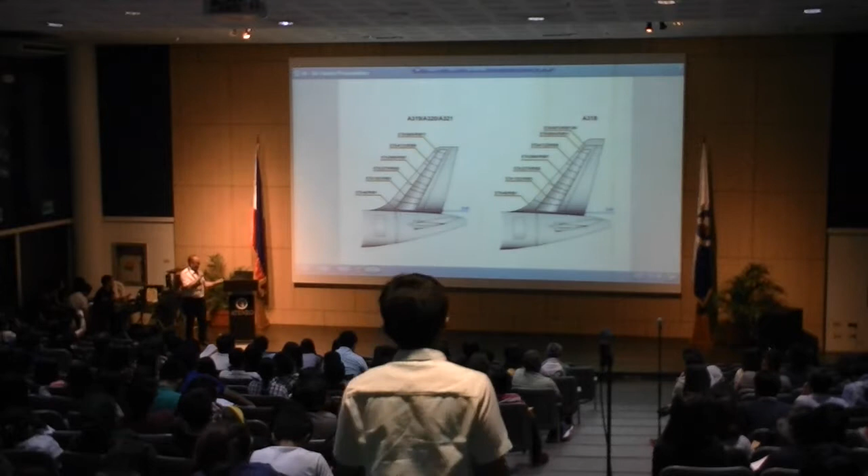Okay, so this one is our wings. So this is the vertical stabilizer, still part of the same section. So this is the wings.

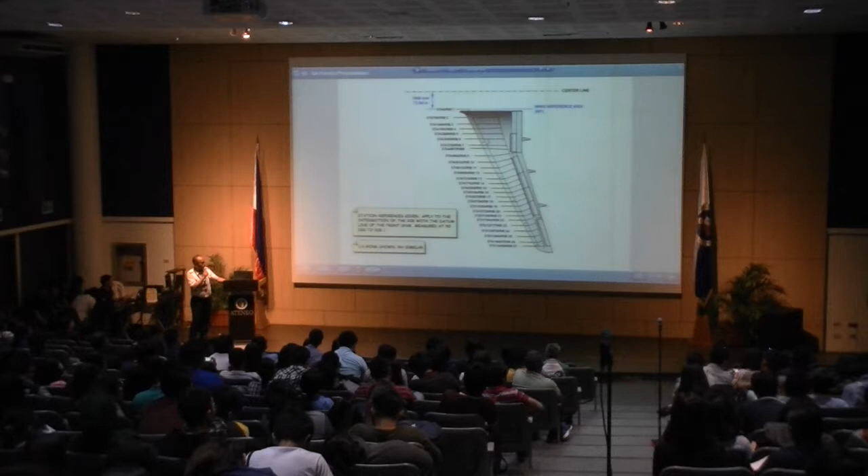Okay, left wing ito. And by the way, for information, those stations are a measurement in millimeters. So if it's your first time approaching the aircraft, for as long as you know station 0, with a measuring tape you can establish what station you're at. Plus you have SRM too.

Okay, so SRM is a software. So that's provided by the OEM, like Airbus, to check on our repairs and our damage evaluations.

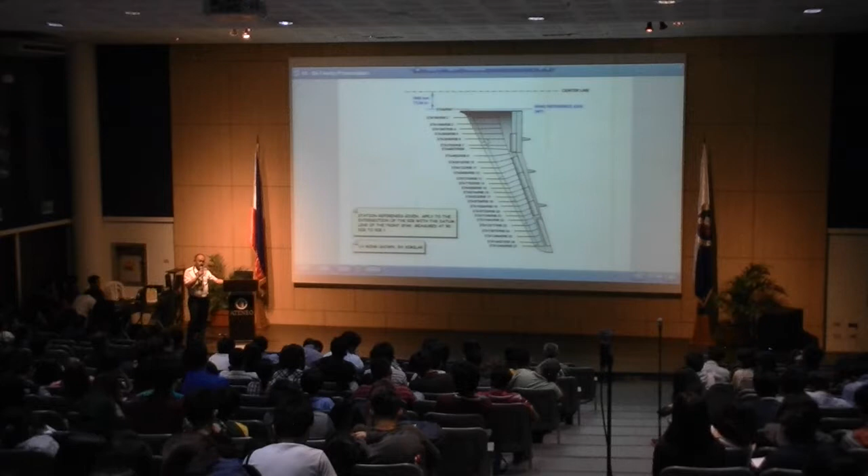Okay, so we have a 2-man cockpit crew. Before, there were days we had a third officer, whose job was to check our instruments. But now our displays are hybrid. Actually, our EIS is now just 6 - we have 6 LCDs in front for the pilot. That's why it's just pilot and FO now; there's a third occupant seat but it's no longer required on the aircraft. So really just two people fly our aircraft now.

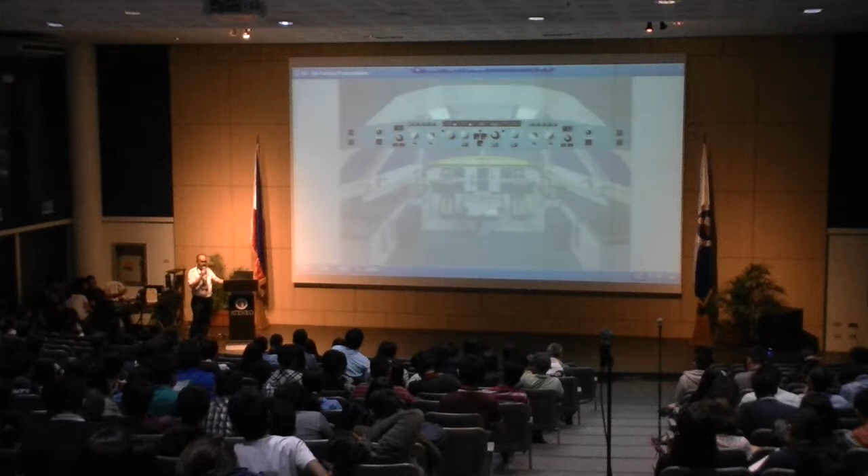Okay, so this is what I mentioned earlier. We call this EIS, Electronic Instrument System. So we have 6 of these - there's the PFD-ND on the captain's side and the FO side. Primary flight display and navigational display.

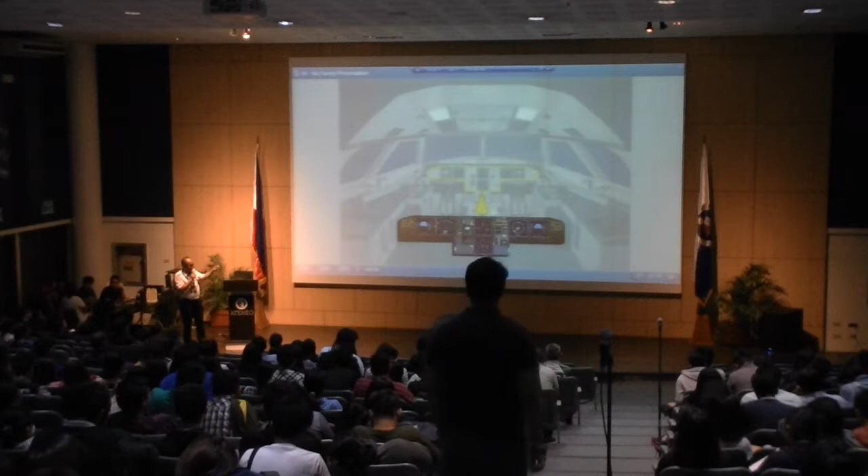In the middle, we call that our ECAM - Electronic Centralized Aircraft Monitoring. So the upper part, in the middle, is dedicated for the engine - whatever is relevant during the flight, relevant to the aircraft, all the way is our engine.

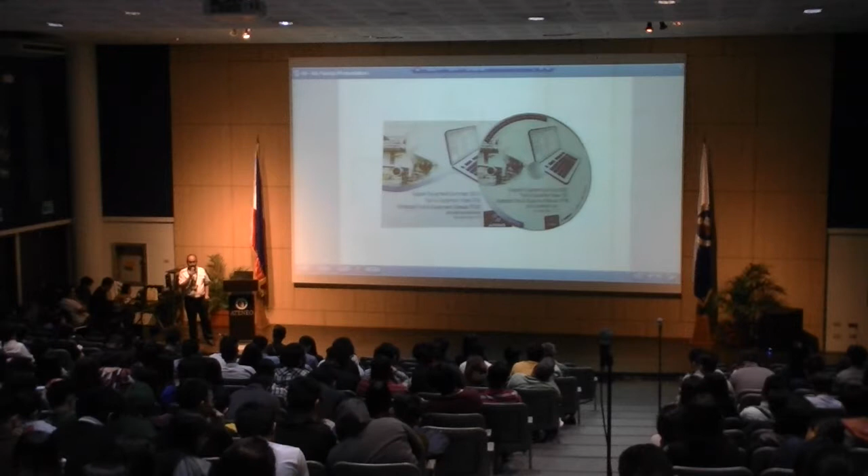Okay, yung tinatawag na Tools Equipment Manual, TEM. So kasi merong specific tool at meron tayong standard tool na ginagamit sa aircraft. Okay, so provided din yan ng Airbus.

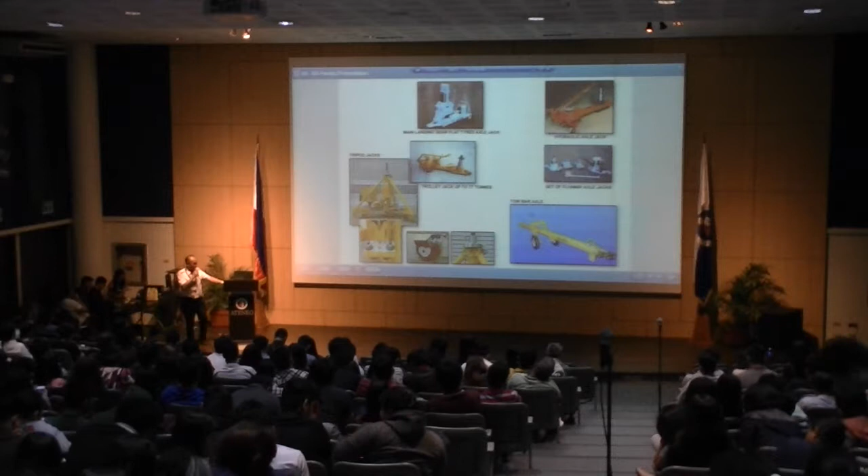Ayan, so ito na yung mga tow bar, ayan yung mga jack. So pagka meron tayong mga gear swing, yun yung ginagamit natin. Okay? Yan, so ito example ng aircraft that is on jack. Pagka meron ka problema sa landing gear, gina-jack up siya.

So meron tayong gear swing. Okay, so this is to check yung integrity ng ating system natin. So parang inaangat mo yung aircraft para makapag-retract ka ng landing gear natin. Okay? So normally ginagawa yan sa hangar. Okay? So this one is aircraft in pushback.

Okay, so doon sa manual ng Airbus, laging mayroong warning and caution. So warning pertains to, normally pag hindi natin sinunod, possibility of injury to person. Okay? Yun namang caution, possible damage dun sa aircraft o kaya dun sa equipment natin.

So that's why during the maintenance, we normally read this one. Meron kaming instances like yung isang trainee namin, nag-power up ng aircraft, anong ginawa niya? Inon niya yung GPU, saka niya sinaksak yung AC receptacle.

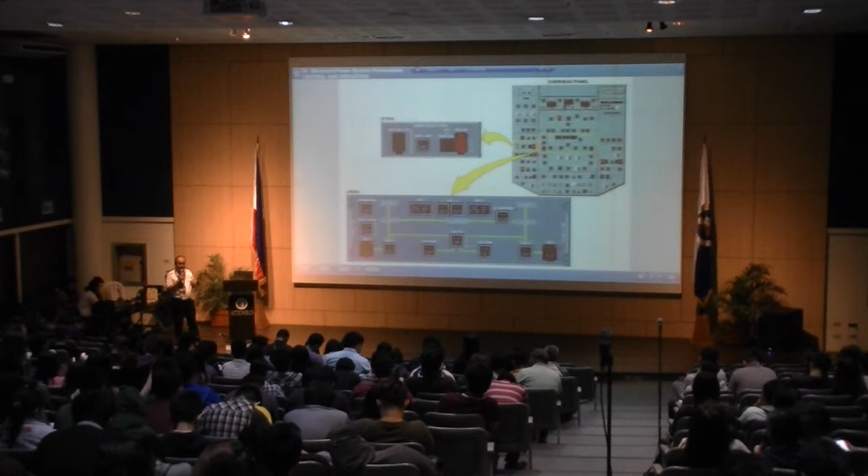Ibig sabihin, naka-off yung aircraft natin. Kasi yan ay nakadiretso doon sa battery mo. So kaya hindi dapat yan basta ginagalaw. Hindi siya pinaglalaruan. Kasi mag-extend yung RAT natin. Ang baba, so pwede siyang tumama doon sa pavement ng airport.

Okay, so ito yung panel natin sa overhead. So sa baba natin, yan sa systems display. Somewhat similar. Sabihin natin na you want to navigate yung systems display natin, so yun siya. Then yung sa baba, these are yung data, yung ating total air temperature, static air temperature.

We have also yung ating time, UTC nga lang yan. Tapos yung gross weight natin. These are essential din yan, no? Kaya lagi siyang meron display na yan.